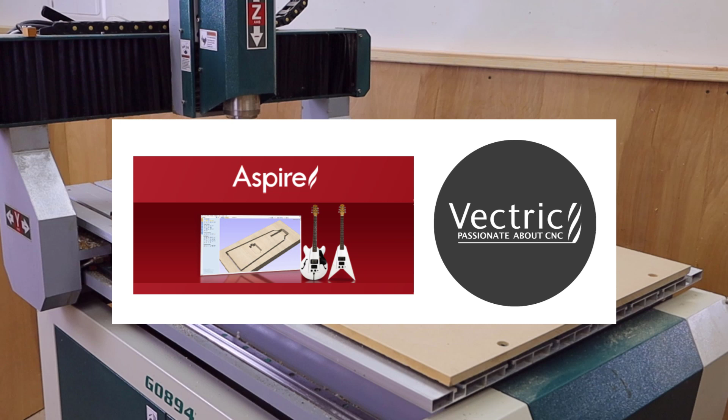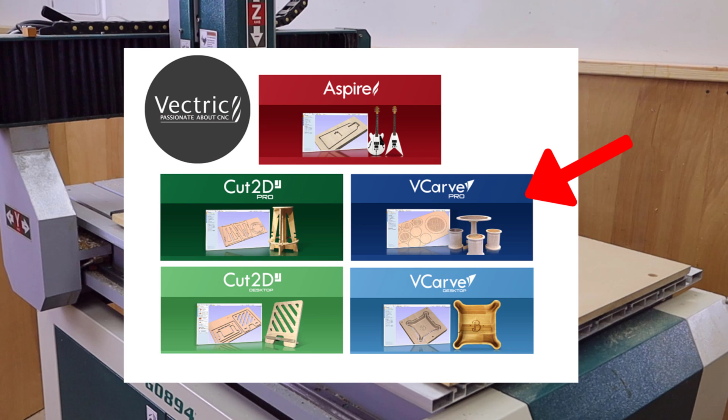For my design work, I used Aspire from Vectric. Vectric has a few different CNC design software packages, and Aspire is their top option. So if you want to design custom carvings like this chair back, then Aspire is a good choice. But if you're just starting out, I suggest you consider their VCarve Pro package instead, since you can always upgrade to Aspire later.

One of the advantages of designing a part on your computer is that once you have your design, you can run it on your CNC as many times as you want, now or in the future.

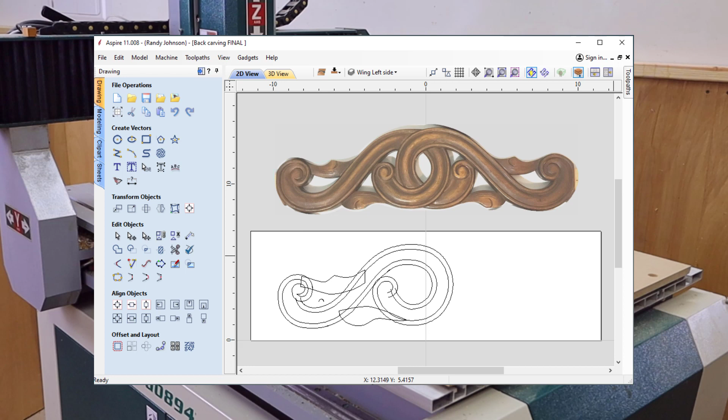I started designing this project by importing a photo of the original chair back into Aspire. I then used the photo as a guide. I started on the left side and then mirrored that to the right side. I then did some custom shaping where the parts overlapped in the middle and adjusted some of the other parts until I got the look I wanted.

Once this side was done, I copied it to the other side and added the curve and some tabs to hold the part in place while machining.

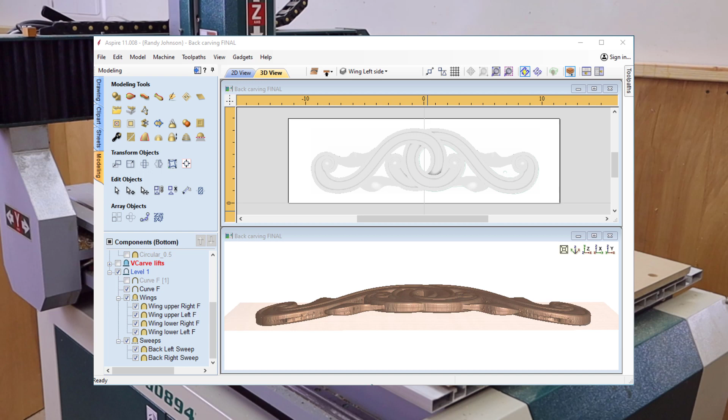With the design work done, I focused on setting up the toolpaths. I was fairly aggressive with my toolpath settings since I wanted to save as much time as possible. And since I was setting up a 4-part production run, I also needed a way to align the 4 parts to the table. I accomplished this with a series of engraved lines.

I then added my parts and held them in place with hot melt glue. If I were making hundreds of these chair parts, I would use some type of quick clamp fixture. But since I was only doing a dozen, I wanted something simpler, and the hot melt glue proved to be a great solution for this setup.

For the 3D roughing toolpath, I combined a Z-level roughing toolpath followed by a full depth 3D raster roughing toolpath. My goal with the Z-level roughing toolpath was to remove as much material as fast as possible, followed by the 3D raster toolpath to remove the ridges in preparation for the 3D finishing toolpath.

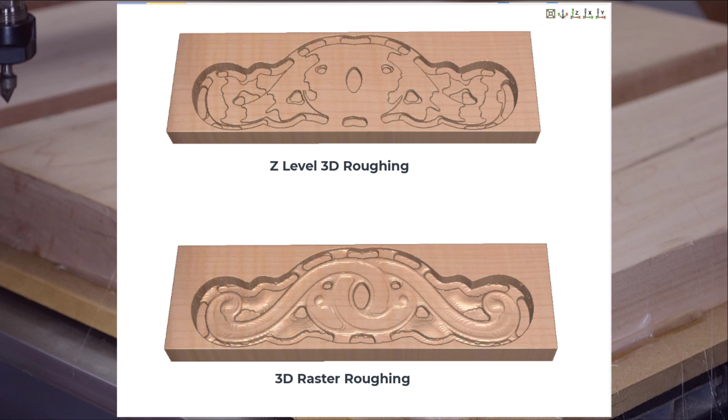I don't usually double up on the roughing toolpaths like this, but I was concerned that the ridges left by my aggressive Z-level roughing toolpath might break off and collide with my 1/8" ball nose finishing bit and break it. The 3D raster toolpath added about 8 minutes, but I saved that time with my aggressive Z-level toolpath setting, so I considered it a net gain in the end.

I also added registration holes to this group of toolpaths. These holes will be used to precisely align the boards when I flip them over for side 2.

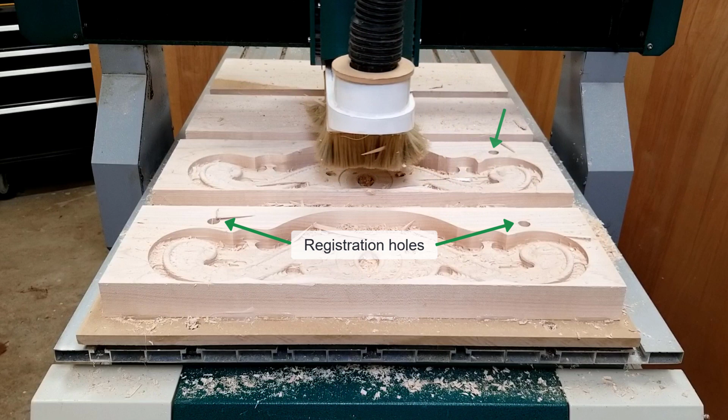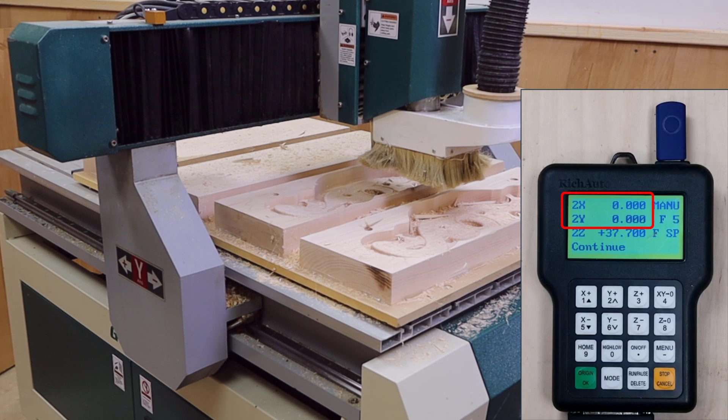But I also needed toolpaths for side 1 to be roughly aligned and centered on each board. So to accomplish this, I programmed a separate XY0 start point for each board on the pendant. The pendant remembers these locations even if the machine is shut off and restarted, so it's a great way to set up projects or jig locations on the table.

Notice how the pendant reads 2X0 and 2Y0. That's because it's at the XY0 location for position 2, which is also the XY0 location for my second part.

To move to the next board, I simply press the menu button plus the number 3 key and then OK. This advances the spindle to the XY0 location for part 3. To run the roughing toolpath at this location, I open the file on the USB drive and press OK.

This pendant also has an array toolpath function, which should have allowed me to run the parts automatically in sequence. But the function had a bug in it, so I was not able to use it for this project. But I also considered this first run as a bit of a test, so running each board separately gave me another chance to check my work.

For the next run, I'll combine the toolpath files with a little custom G coding so they automatically run in sequence.

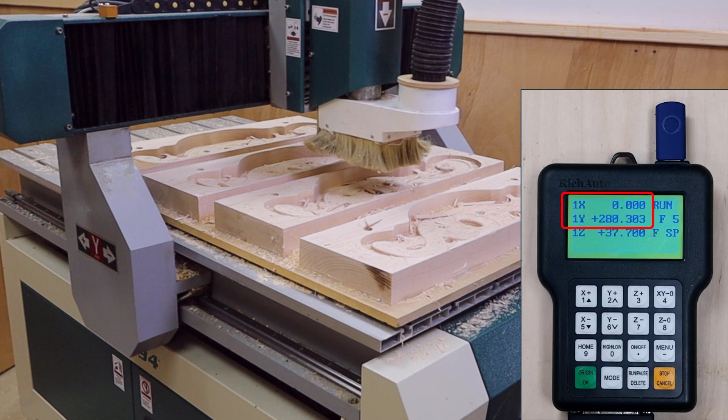When I ran my MDF test part, I used a long 1/8 inch ball nose bit. But for the final parts, I wanted to use a shorter bit, mostly to reduce the chances of chatter and breakage. Plus, most of the carving of this project only uses the tip of the ball nose bit anyway, so the long bit seemed like overkill.

But I had overlooked that the short bit would cause the collet to collide with the project in the deep areas. Fortunately, I caught this before running the file. I still wanted to use the short bit, so to solve the problem, I added a clearance rabbet in the problem areas.

The clearance rabbet did the trick, and running the finishing toolpath with the short bit was now straightforward.

Adding the V-carve details was the final toolpath for side 1. I often add this kind of detail with my hand carving tools, but for this project I used a 60-degree V-bit and I was happy with the result.

Removing the parts was actually pretty simple. A little pressure from my chisel and they popped right off.

The hot melt glue only lifted a little fuzz off the MDF, a nice benefit compared with the marks left by screws, which I use a lot on my other machine.

In preparation for side 2, I added registration holes to the spoil board that matched the location spacing of the registration holes on side 1.

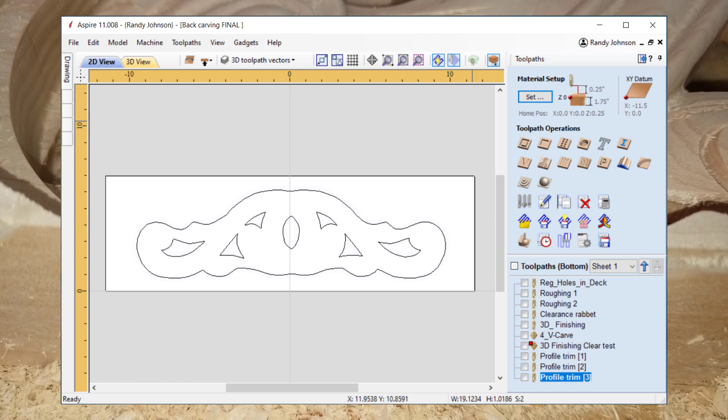Vertical edges on 3D models from Aspire often carve rough. It's the nature of how the 3D model is created. There are various ways to minimize or eliminate this problem, but for this setup I opted to add a simple trimming pass around the edges with a straight bit.

In the next set of chair backs, I plan to add some draft to the model, which should machine smoother and give me a little more material if I decide to trim it away.

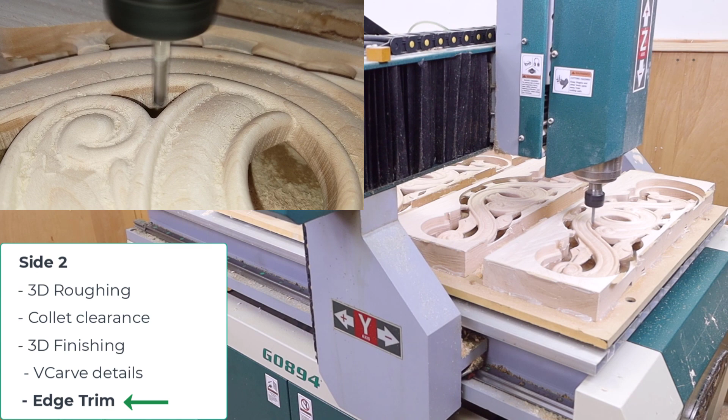I still find it mesmerizing to watch the machine operate, especially knowing how much time I'm saving on this project, and also considering how little floor space this machine takes up.

So if you're looking to get into CNC, there certainly are some things to consider. Price, time, learning curve. But most people find more ways to use their CNC than they ever imagined. I know I have.